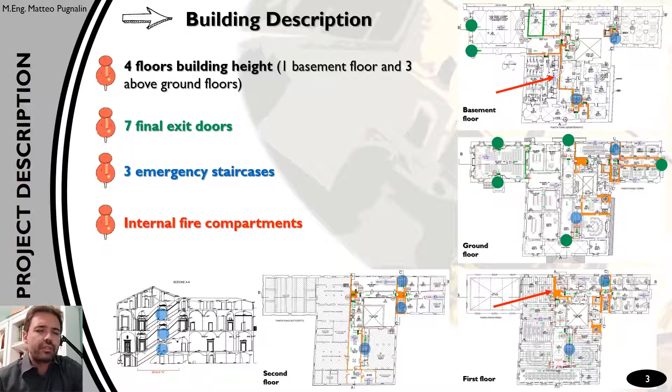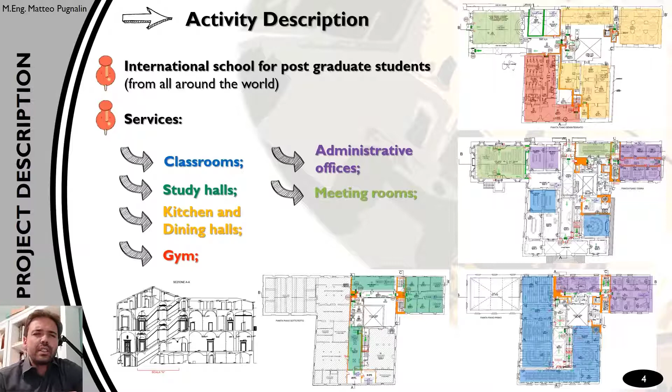The activity description: we consider that it's an international school for postgraduate students who come from all around the world. Inside the building we have classrooms, study halls, a kitchen and a dining hall, the gym, an administrative office, and 2 meeting rooms for internal conventions.

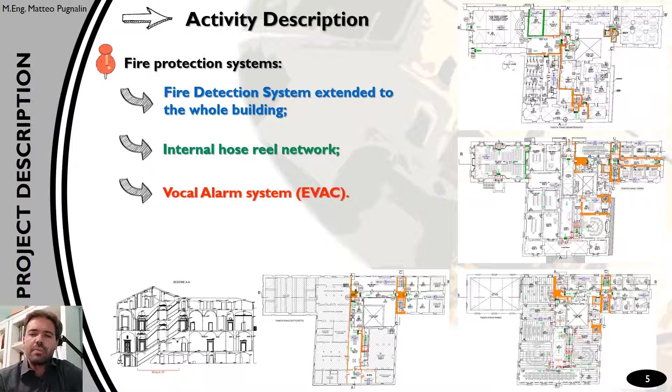Which fire protection systems are already installed inside the building? We have the fire detection system that protects all the areas of the activity, an internal hose reel network, and we implemented the existing vocal alarm system, the evac system, in order to reduce the travel time, the evacuation time, the pre-movement time.

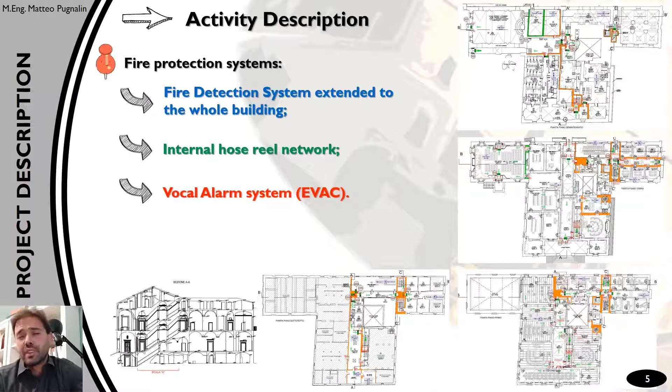The occupant description: we consider that the occupants are familiar, because the course has a duration of more or less 6 months, so people know the building, and are awake because there is no dormitory inside the building. So we classify the people inside the building as type A according to ISO standard.

We consider that inside the building there are at the same time, in the worst case, about 250 people, and we consider in the management of the safety plan that many of them are foreign, so all communication needs to be given in more than one language, not only in Italian. Okay.

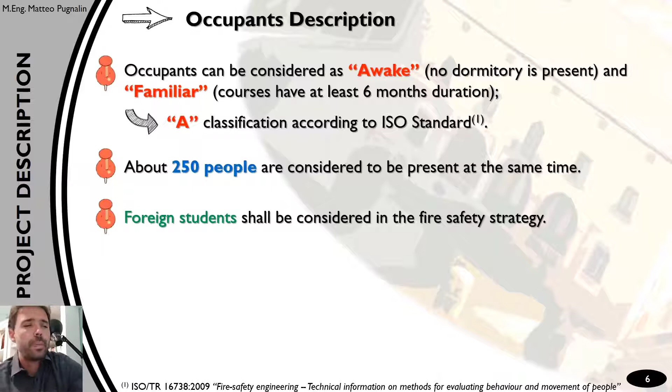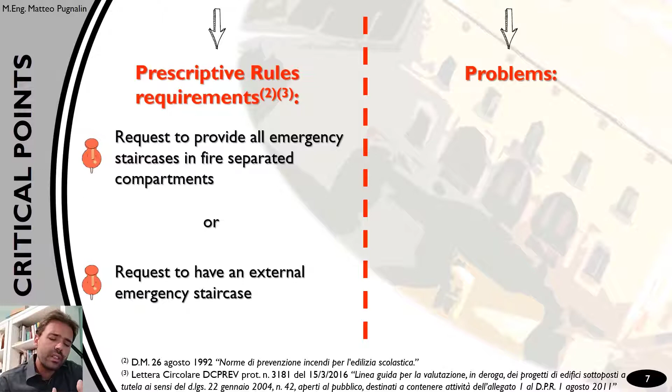So, which are the critical points? The main critical point of this project is that the Italian fire rules require that all the staircases are separated from the rest of the building, or that staircases are external, and it's impossible for us to adapt to this prescription because we have historical restrictions on the building, on the main stair inside the building, and on the facade, so we cannot modify the internal layout of the main staircases.

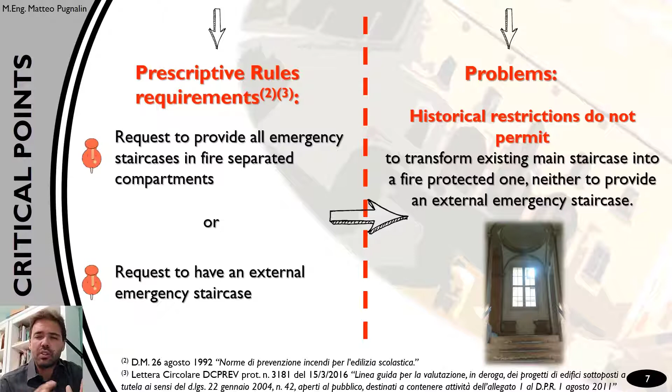So it's not possible for us to install new fire doors or modify the walls in order to have fire separation, and it's not possible to realize an external staircase because it's not possible to modify the facade of the building. So it's necessary to pass from the prescriptive method to a performance-based design approach.

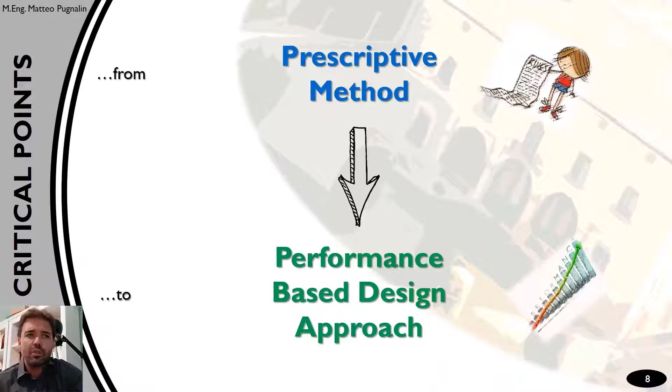Which are the fire safety strategies that we developed in this approach in order to reach an adequate safety level? First of all, the first measure that we developed is an intelligent active dynamic signage system that I explain later. Then we substituted the existing furniture materials with new ones that have a classification for reaction to fire, in order to reduce the fire growth in case of fire.

We installed new fire rated doors in order to increase the number of fire compartments inside the building, to reduce the spread of fire and smoke. We calculated the evacuation time with a hand calculation method and also with egress simulation software. Then we did a CFD analysis to evaluate the available time that people have for evacuating the building. And we improved the safety procedures in case of fire, so we improved the safety management level of the activity.

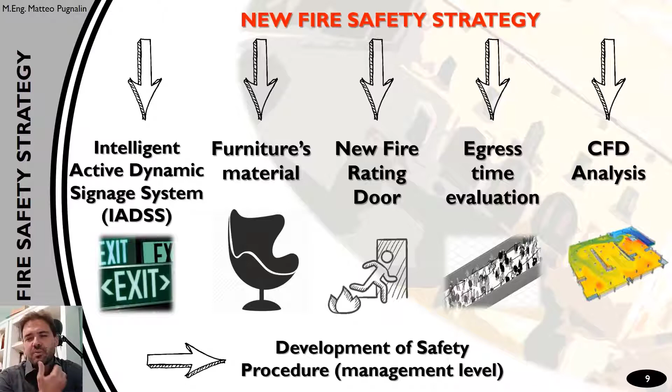So the main philosophy of the intelligent active dynamic signage system is a system that can modify the egress route, the egress path, in case of fire based on the position of the fire. The fire detection system identifies the position of the fire, and the system modifies the status of the signage installed in the building, modifying the egress routes that are available and the egress routes that are not available.

And in this way, we can avoid that many people go from the starting zone out through a fire zone. The emergency signage prevents people from going through the fire zone, and this system changes and modifies its status according to the position of the fire.

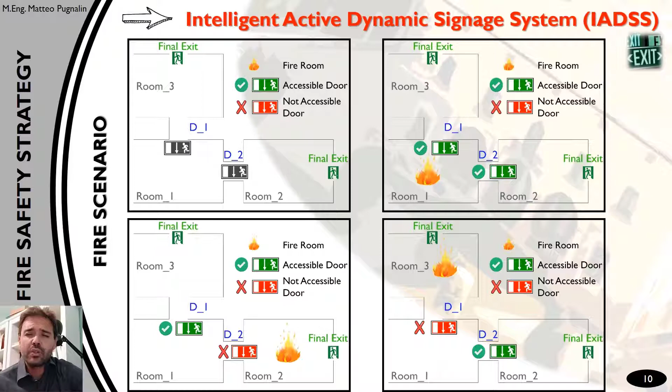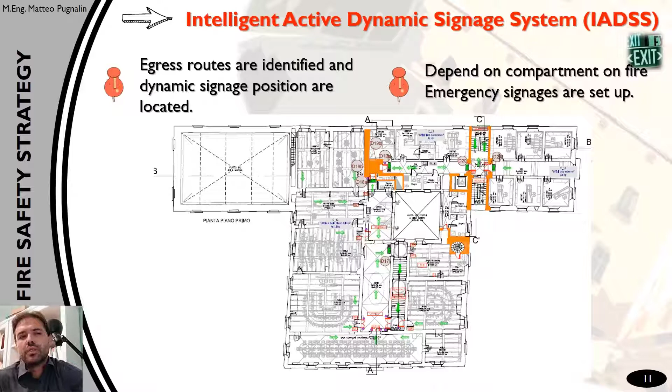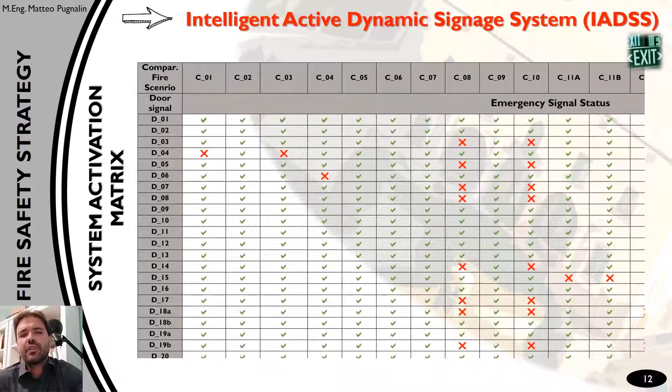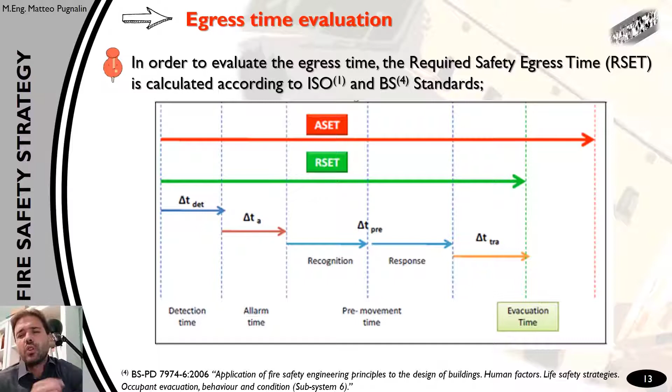And so you can see that we installed this dynamic signage all over the building, and we developed a matrix in which, for every fire scenario, we indicated the status of every dynamic sign inside the building. And then we did the calculation of the evacuation time following the RSET philosophy, the concept, and according to the values proposed in the ISO standard.

We paid particular attention to the calculation of the time for passage, because in this case, with some egress routes that could be not available, there are many areas with a great number of people inside, and so the density is high. So we have a crowd in some places, and we need to calculate the reduction of the speed and the evacuation time due to the density, due to the crowd that we have in some points.

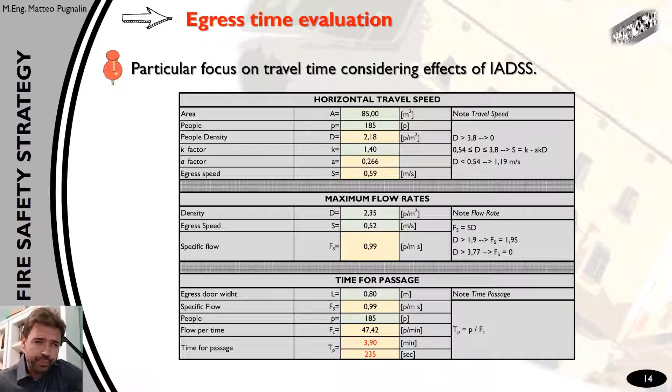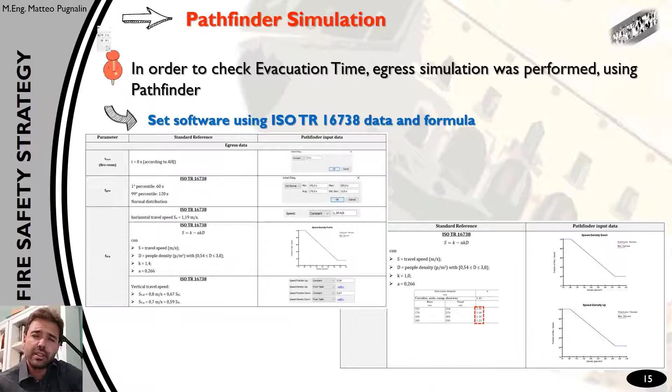And then we checked the values that we calculated with the hand calculation method with the software Pathfinder. You can see in this slide the main input data that we inserted into the software, and then we verified and compared the values we have with the hand calculation method and the values of Pathfinder, and the variation is about 10% of the time, and the hand calculation gave us a more conservative result. So for the evaluation of our project, we use the more conservative values.

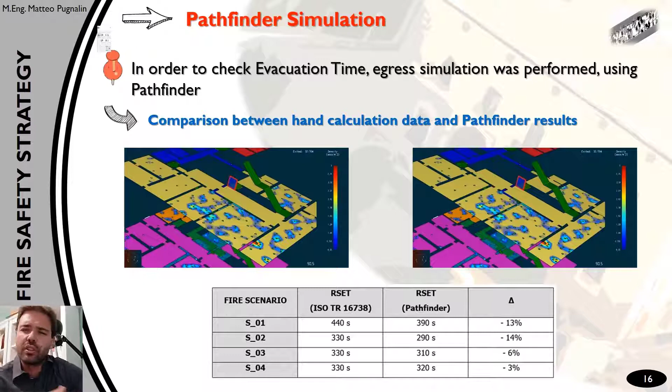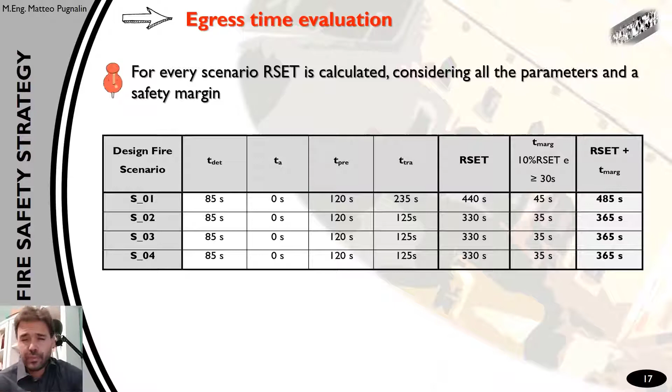But it's important for us because in this way we have a comparison between our calculation and the values of the software, and so we can check if the hand calculation method is correct or incorrect. And so for every design fire scenario, we calculate the RSET, considering also a safety margin, safety factor, according to Italian regulation, and then we develop the safety analysis using the software FDS.

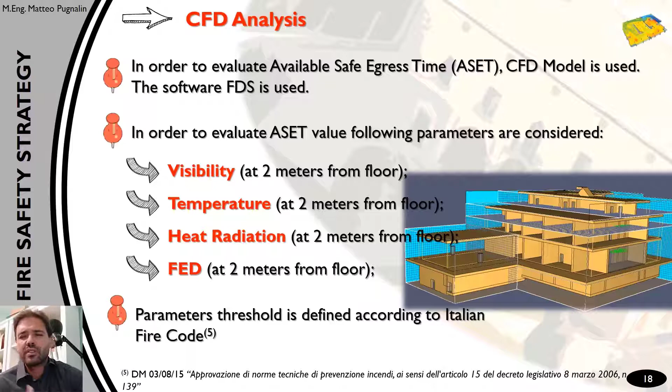And for every fire scenario, we consider some parameters connected to life safety: the visibility, the temperature, the heat radiation, and the toxicity of the air. The threshold parameters are defined according to the Italian fire code. So we consider 10 meters of visibility at 2 meters from the floor, 60 Celsius degrees at 2 meters from the floor, 2.5 kilowatts per square meter at 2 meters from the floor for heat radiation, and for FED we consider 0.1 as a threshold value.

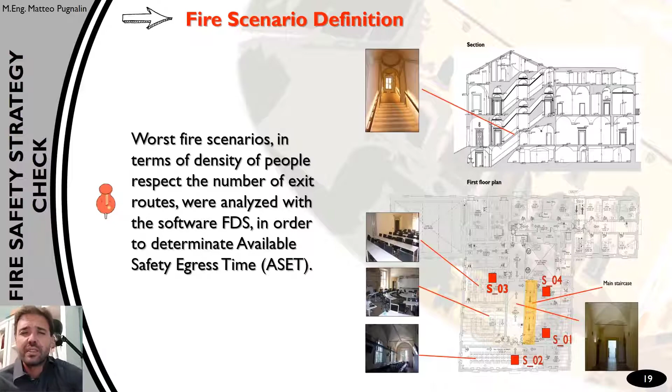And then every fire scenario we evaluated according to the Italian fire code, but also with NFPA 101 and the SFPE handbook. So we evaluated the 4 fire scenarios that represent the worst case, and then we did the safety analysis, and the result of the safety analysis is given in the table that we can see in the bottom part of the slide. So we compare the ASET of every value that we evaluate with the RSET that we calculate with the calculation method, and verify if this comparison is good or not good for our goals.

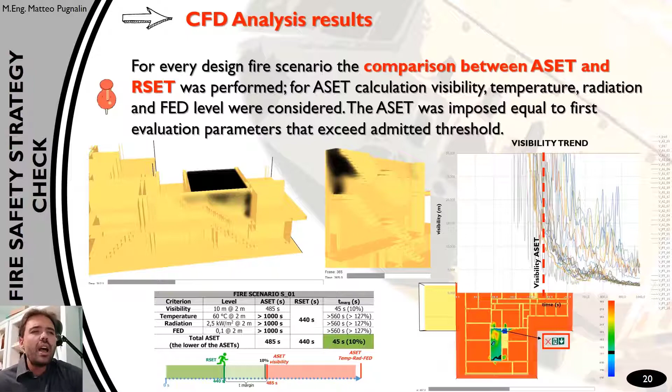So, what are the conclusions of this study? The analysis of human wayfinding has led to developing a new strategy for evacuation in emergency. The intelligent active dynamic signage system has been considered to redirect people, indicating the viable and not viable exits depending on the position of the fire source, identified by an automatic detection system. We have a low impact on the building, since it does not need a layout modification, and the active intelligent wayfinding system monitors the human egress process, spreading of the fire and damage to the building, and suggests the best escape path depending on these conditions.

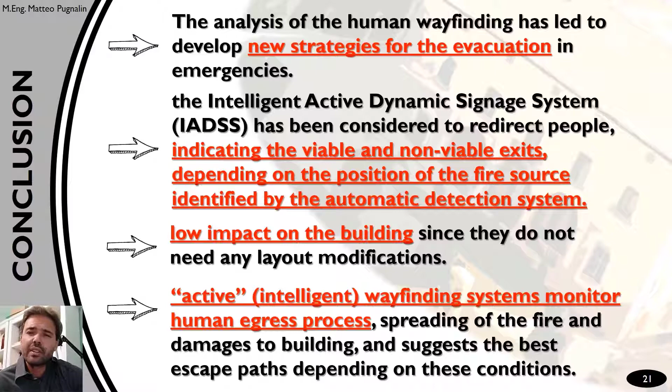And so the performance-based design approach leads to guarantee that the system reaches an adequate safety level, even if we cannot punctually respect the prescriptive Italian rules. So you can see some references that we used. There are many Italian references, but also international references that we used for the development of this project.

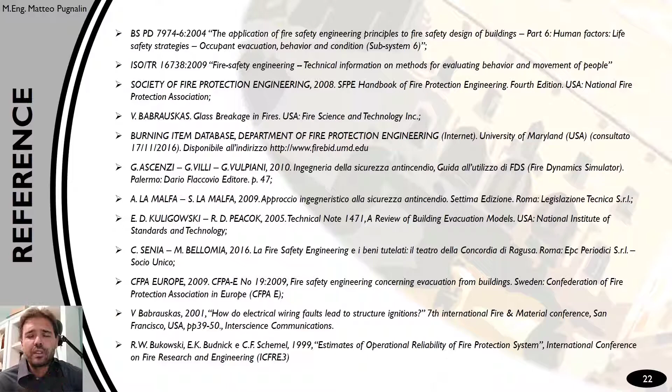So when simulating the evacuation, did you run multiple simulations and evaluate them statistically? And in the case of active navigation, according to the movement of people, is there present any predictive simulation?

Okay, so yes, we did several simulations considering different locations of people inside the building according to the density that we consider the real density. The results that I show on the slide are the result of different simulations, and we compare the mean value with the hand calculation data that we have as output of the application of the ISO standard.

Okay, and then in the case of active navigation, was there any predictive simulation of just the movement of people, predicting where they would be over time?